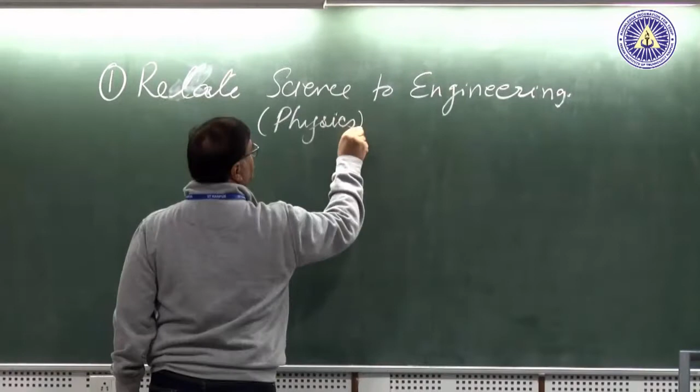Science, okay, so let us say physics. You are a physics teacher? So I would say each component contributes, but since you said physics, I will also write physics specifically.

So that is relating science to engineering, is that what you are saying? I mean, can I put that in a category, or do you want to say something more? So, engineering and applications - since you said a word, let's put this in as well.

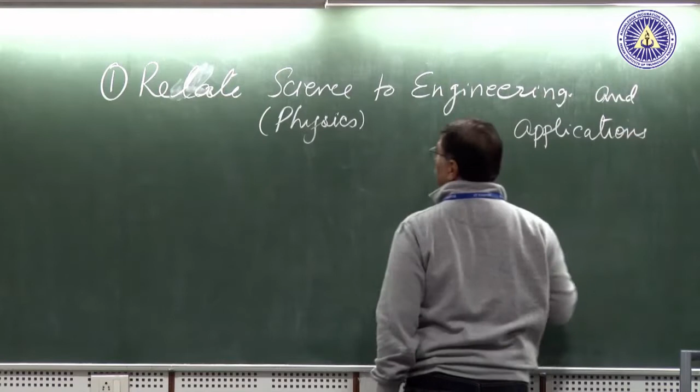So that is one purpose, right? What else can you think of, and what else do you think of when you teach?

Speak up, otherwise it will go wrong. Say something, I mean there is nothing wrong. We are just trying to develop ideas.

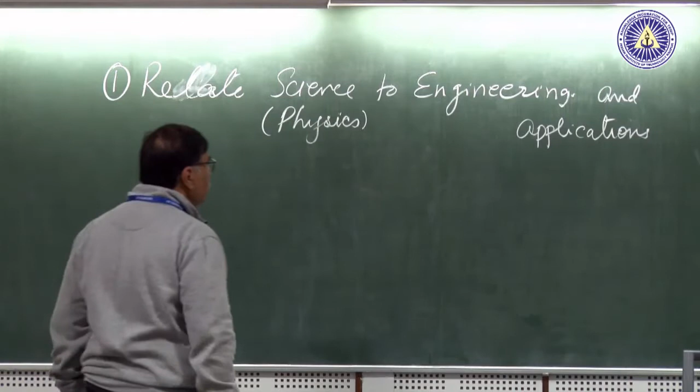I will add to it now, okay, I will start adding. So this is one point, but this is something anybody can say, that I want to do it, right.

I will add a few more, but I would like to know, when you say it is easy to say that I would like to relate science to engineering, when you teach it, how do you do it? Or if any one of you has done it, how do you relate it to engineering?

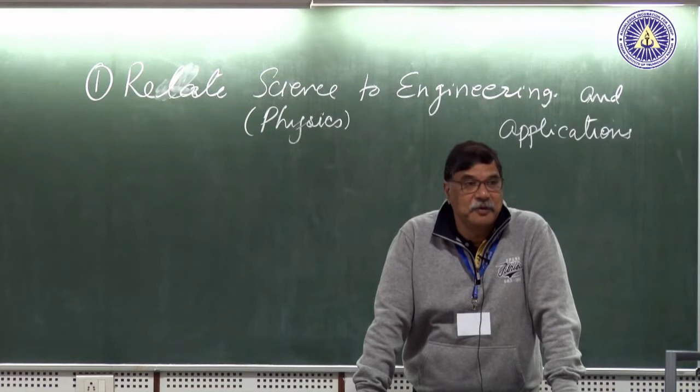See, we can say that, like he said, physics is the father of engineering, right? So what do we see happening? I want to understand it - number one, I want to understand it. Number two, I want to see how that phenomena can help or hinder any engineering application. For that, I have to work hard. I have to see engineering problems, see what they do, and then relate it. That's where your role comes in. So, I am still looking for more answers.

Has any one of you, although you are starting anew, think of an example where you would relate it to engineering. Engineering also means I am talking to students who have just cleared 12th grade. They have seen some things around them, but not necessarily great engineering marvels, so I have to show them the beauty of science in the small engineering they see around, so they start appreciating it. The mistake we all make is trying to relate to big things, like a nuclear reactor or an aeroplane flying. A student who has come from a village near Madhubani may not have seen an aeroplane, but he has seen other things, so we relate it to those.

This is one part we must keep in mind in core teaching. I am bridging from 12th grade, making them graduate to a place where they start seeing how it is applied and why it is relevant. But more important, as somebody said, students have come just to clear the exam, most of them. But I would not be that harsh, even if they try to see the science in a bigger way.

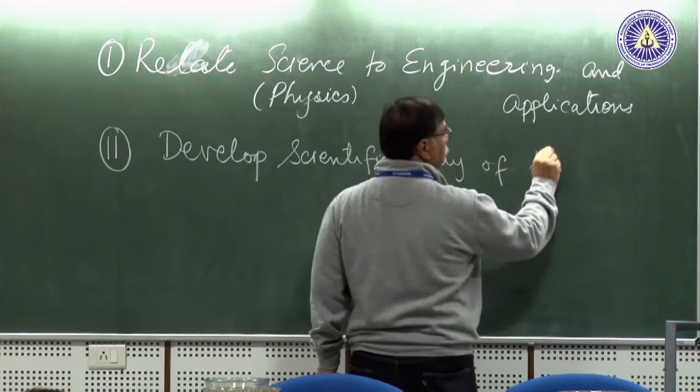Very important - if I just take Kleppner or Resnick-Halliday and solve the problems, I don't. This is where I as a teacher come in. I want to show them the bigger picture. I want to show that it's okay to make mistakes when solving a bigger problem, but then you also learn how to come out of that mistake, how to analyze. So this scientific way of thinking is what in parlance is known as scientific temper.

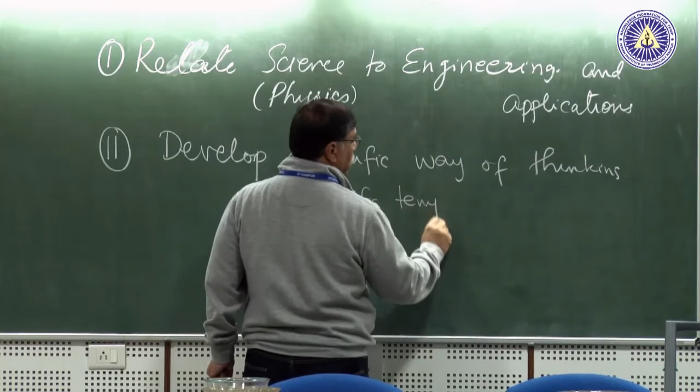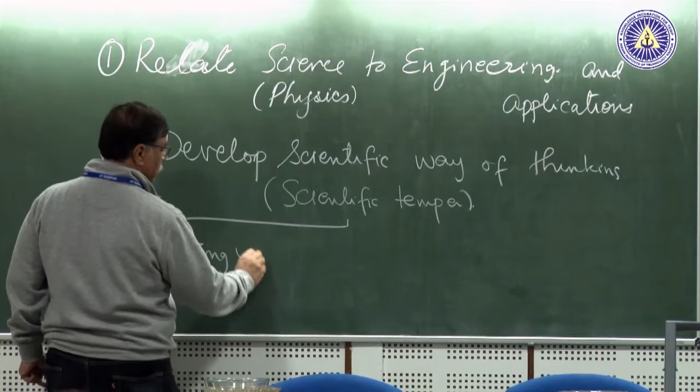Which will involve setting up a problem. If I look at, for example, why is it important - suppose in a civil engineering structure, some crack has developed, and I want to analyze why it happened. Is it that the cement dried too fast? Is it that the water ratio I used was not proper? It is formulating a problem. So, setting up, or I would even say formulating.

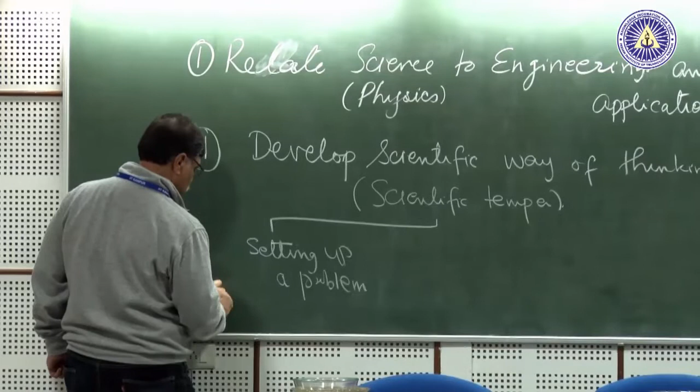I want an engineer, I want my student, when he or she goes out, to be able to look at a problem and see why it happened. I formulate the problem, and that requires scientific thinking. It is not just that I've been given a problem from Halliday Resnick or some coaching book and I solve it - I have to really look at it. Maybe it happened because of this, maybe because of this - so I list 4 or 5 possibilities, then scientifically remove one or two of them, and arrive at the real thing.

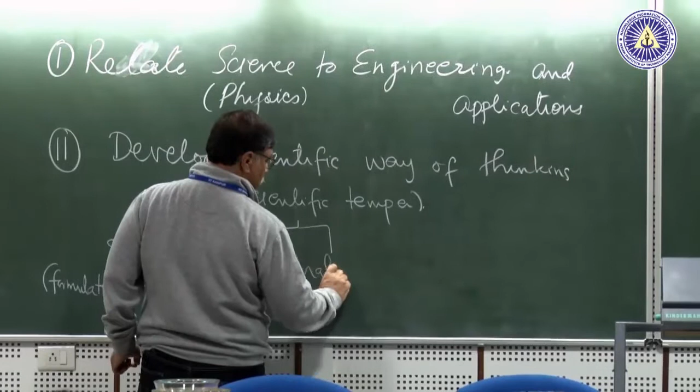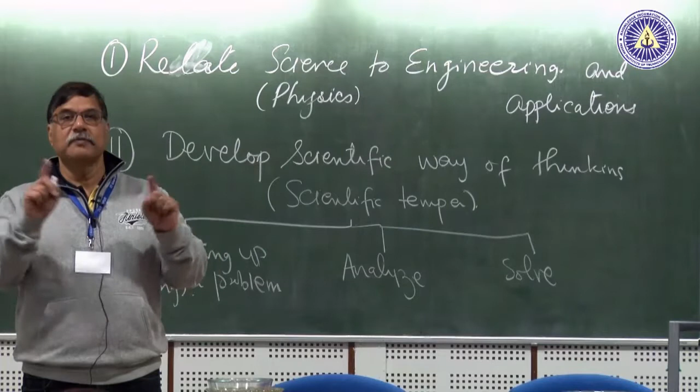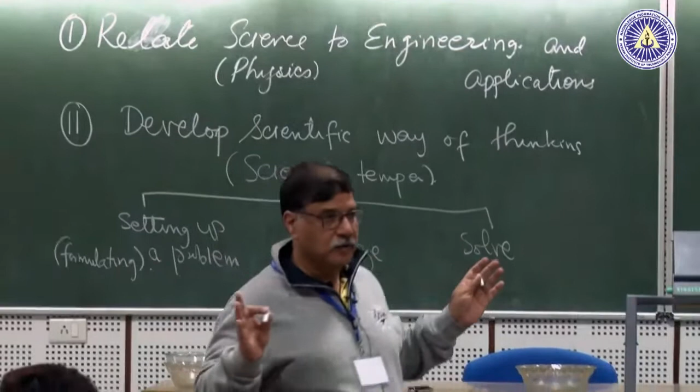That is called formulating the problem. And once I formulate a problem - setting up a problem - that is analyze and solve. When you solve, even in engineering, although we make our laws precise and exact, they are exact because I perform those things in ideal conditions. Real life is not ideal. When I say Newton's first law, something in the state of motion remains in motion if there is no other force, but in real life there is friction.

And how do I take care of that? Similarly, if I am a defense engineer designing an artillery, all I would say is this is a projectile motion parabola, but in real life there is friction, drag. Higher the speed, the power related to velocity is even higher. I should be able to solve it within some approximation. And finally, what do I want? If I am firing a shell, I don't want it exactly 500 meters - it could be 505 because after all a shell makes a hole of maybe radius 5 meters, so within 5 meters I am okay. So, how do I solve the problem in a meaningful way? I would not say approximate way, but in a meaningful way.

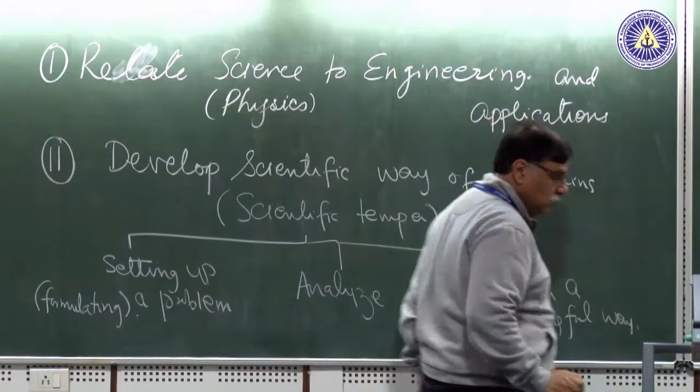I don't like to use the word approximate, because approximate somehow means it may be exact, but no. But even if you solve it approximately, it could be very meaningful, in a meaningful, relevant way.

So develop scientific way of thinking, relate science to engineering and applications, and the two are related. When you solve the problems, you relate it to engineering problems and how some great minds worked to solve a certain problem, right.

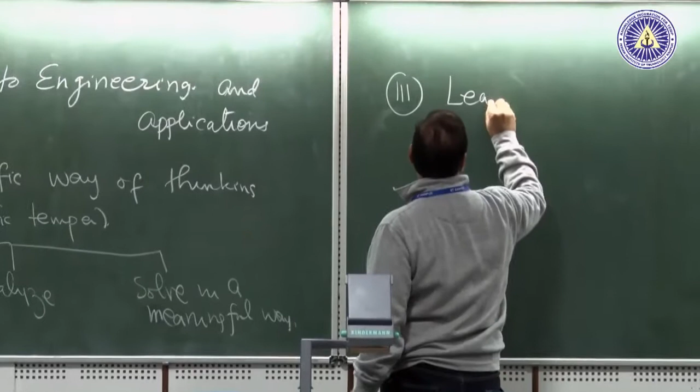Although it may come under this, learn to take up some challenging problems. I mean, people don't emphasize this for fun, this is you challenging yourself. Can I solve this tough problem? Whenever you are teaching core, although the kids are here, you should always give some challenging problem. Let them see how much potential they have, right? And it also takes the fear out of them. A lot of students are scared of using symbols of mathematics, curl, divergence, things like those. Take the fear out of them, make them solve a lot of problems and keep relating to different things.

Okay? Now, can you think of anything else? I mean, this is, if I can accomplish this much, I think core I have done, right.

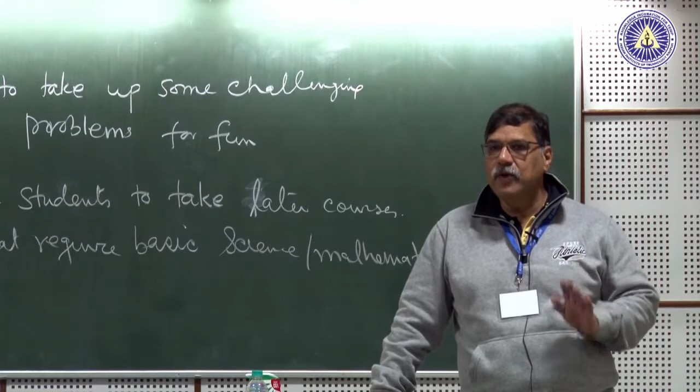So, fourth important thing, although we said that there should be a bridge thing, this is the application part, but I think if I consciously write it, it will be good. Prepare students to take up future later courses that require basic science, mathematics. For example, if I am teaching electromagnetic theory, and I do that in my courses, most of the mathematics that is used, and I am going to show it to you, is exactly the same that is used in fluid mechanics. If I train them well in electromagnetic theory and try connecting with other fields, fluid mechanics, and flow of heat and things like those, I actually prepare them for heat and mass transfer.

I have done that in the class, and the students have later come and told me that, sir, that course, that time we thought you were teaching very tough, but later we realized it was very good, because fluid mechanics became very easy, heat and mass transfer became very easy. So, the core courses play a very important role.

Core courses develop scientific way of thinking among the students who have just come fresh out of 11th or 12th grade, thinking they know all the science. Then you can ask them to analyze the problem scientifically. They also think, why am I studying this? So you prepare them, you tell them the immediate goal that you relate to the subjects later. You also tell them how all this is very relevant to what you do later as an engineer. And even some things, if I give you a challenging problem, it may not look relevant even to me today as an instructor, but later you may find it useful.

Okay, so anything else that you can think of? If I am teaching a core course, and most of you are teachers in physics, mathematics, chemistry, physics, you keep these 3-4 goals in mind, your course will become fantastic.

Yes. And to our teachers who are from engineering background, it would also help you if you attend the classes in core course. For example, yesterday he emphasized that you become tutors. You will be able to explain the engineering points much better from a scientific point of view. Also, in this developing scientific way of thinking, yesterday Professor Upadhyay emphasized that you have to update your courses.

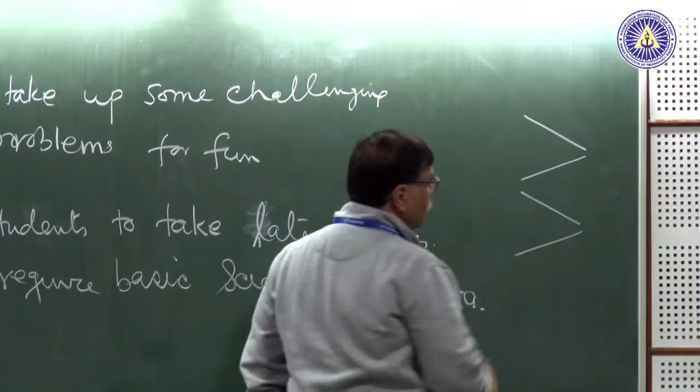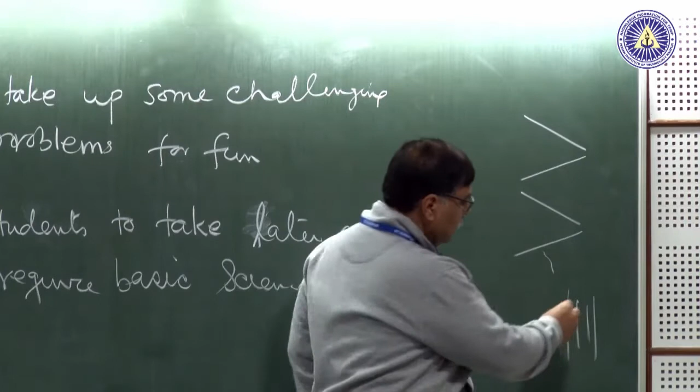This was my big lesson. We made strips like these, made them very smooth so they are almost frictionless. Suppose this is a strip - we put two wires on each strip, and when the coin went in, it connected with the two wires.

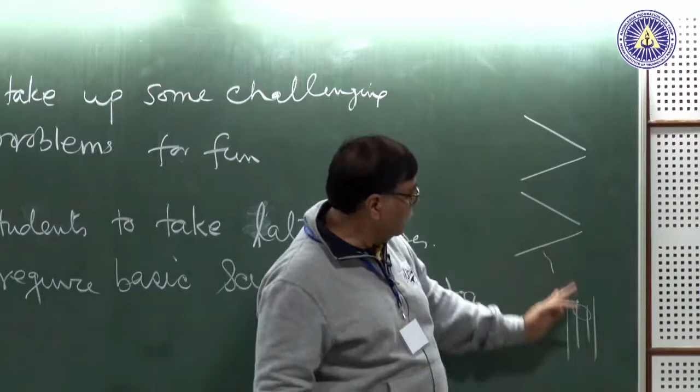So current started flowing, and that current powered an electromagnet that opened a valve and the water came out. We calculated the time so that exactly in 1 rupee, if you wanted half a liter, we gave that slope and half a liter of water was supposed to come out. Everything was fine, we made everything, then we did the experiment and put the coin in, and boom, the water kept coming out.

What went wrong, and again this is through experimentation - the coin didn't move. But why didn't it move? It's not because we hadn't calculated the time, that we had done already, it was matching.

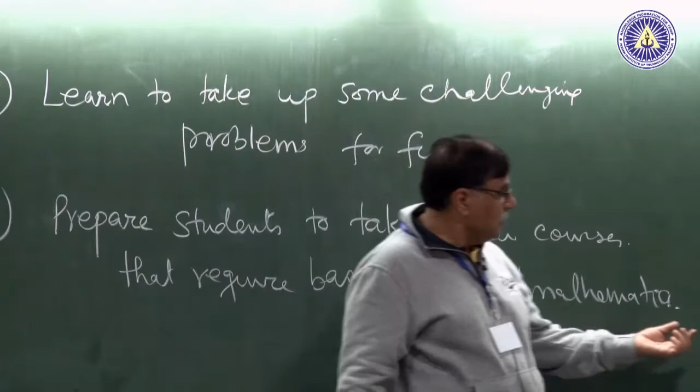What happened was something we could not see - the moment the current flowed, there was a lot of magnetic field that held the coin right there.

So what we did, since our project evaluation was there, we took a coin, made a hole, put a rod through it, and kept pulling the thing out. The instructor in charge said, oh, now this only works with a particular coin. But he appreciated the effort, and we said this very honestly, and he said no, this is - you have learned what the essence of design is, that you have to experiment.

So through all this you have to teach whatever science you are doing. If you want to relate it to engineering, find applications, and along the way you can also do some fun experiments so the class becomes exciting, but then you keep relating it.

In the back of your mind as a teacher, as a driver of the class, it is clear where you are going. So what I am now going to do is take a few fundamental principles and try to tell you how to demonstrate them, how to relate them to engineering problems. All right, let's begin one by one.

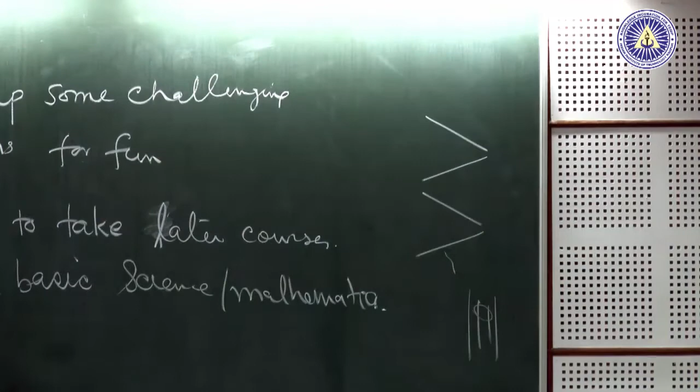I will start from mechanics, go all the way up to electromagnetic theory, and along the way we will also do some fun stuff. This is fun, but at the same time when you are doing it in class, you have to keep explaining the principles behind it and keep relating it.

So just to start and have fun, let me call one of you. Why don't you just come here? Anybody - yeah, you come here. Just stand here. Demonstrate Newton's third law. I don't want you to move. Demonstrate.

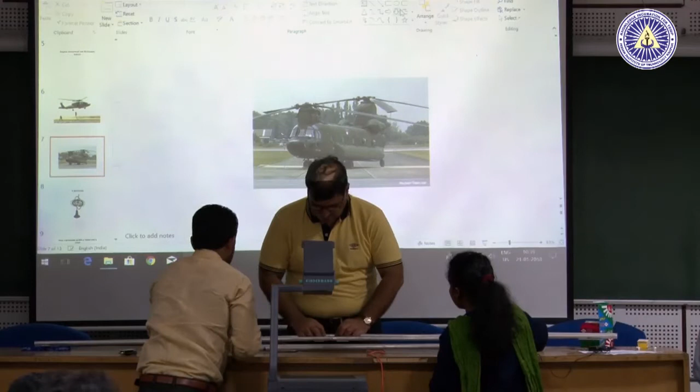This is at the end, so let's make this track, all right? To give it height, because I want something to roll on it. Okay, and then there's the last one. Put it here.

All right. Okay. So you see this? All right. Let's remove all this junk so that it's all out. Now, what I want, a lot of people, you should come and play around with it.

Okay, what I want you to do is, I have these 4 different kinds of rollers. Alright? So, honestly, I have a little smaller one, but the bigger ones are okay. Honestly, I'd like you to come.

Do you need this? Yes, remove that one too. I'd like you to come and honestly in your mind think about, if I leave a roller from here, which one will go all the way through all the curves. Okay? Come here and honestly tell me if what you thought was okay.

Try all these 4. Who was what? Okay. So you show, please, it is as if your class. I am doing this and this is what is going to happen, I think this is what happens, and then you show the result.

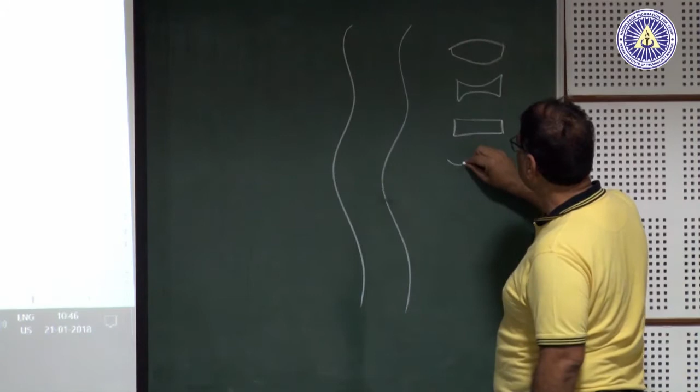So what we have learned - please, anybody else who wants to do something? So what we have done is we have taken this cylinder, a plain cylinder, and a cylinder which kind of fools people that, oh, it will cover the thing both ways,

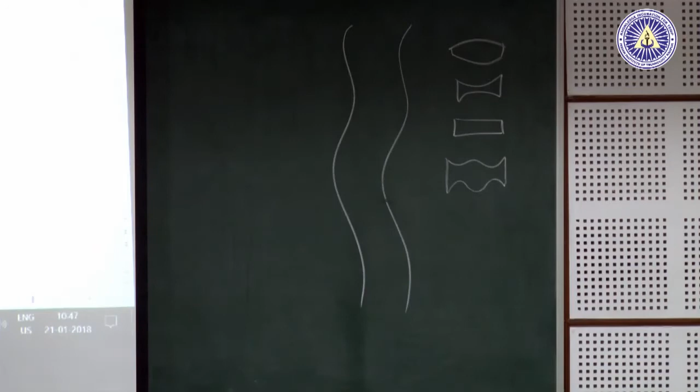right? It is this one that goes through. Why? Sir, when a curve comes and the cylinder slides in, either in one way, and the radius changes. The radius changes, right? Where is it used?

Railway - so I'll show you that. Okay, it's an engineering application. Okay, so now I'm going to show you. Page down.

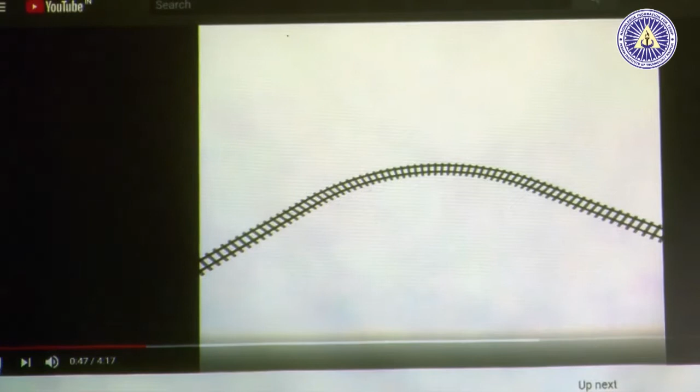Right now, you see, it shows the two radii, and when a wheel goes - now you see, this is precisely that roller that we used. The middle part is removed, right? Now when the wheel goes, it's supposed to... okay, now it will start moving.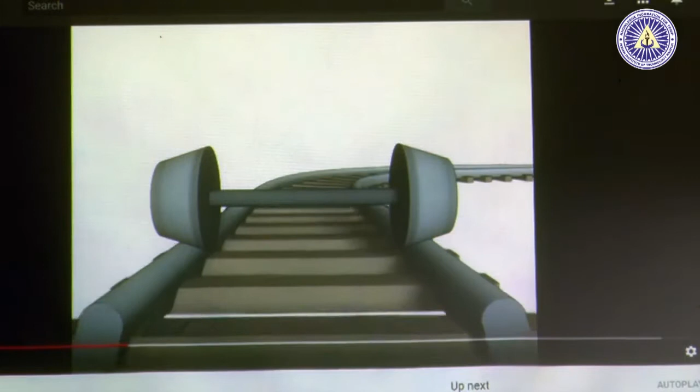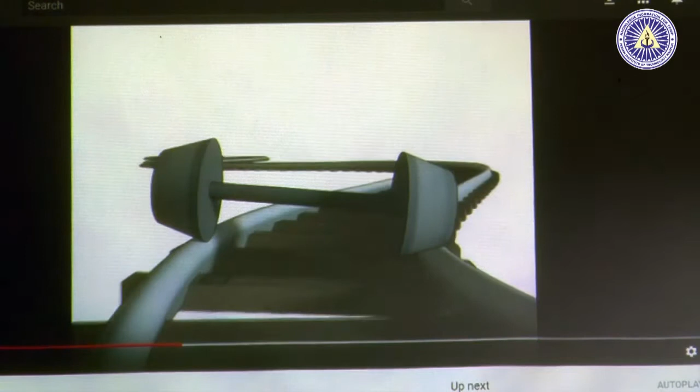Now you see, because it's turning to the right, the left wheel has gone up on the track, and therefore its radius of curvature becomes larger automatically. With the same omega, the outer wheel now goes faster. Similarly, when you go the other way, the wheel on the outer side will always have a higher radius, and therefore it will negotiate curves both ways.

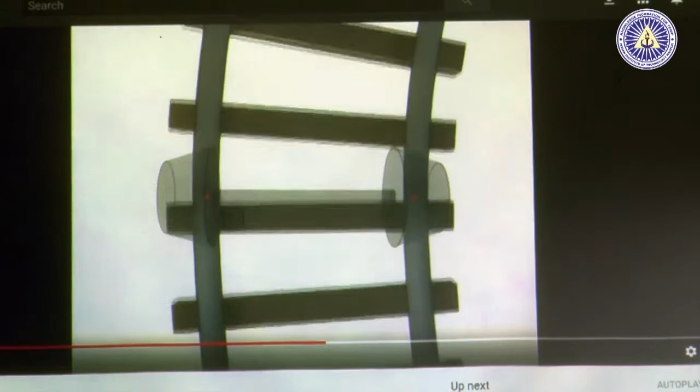Somebody, when making railways, must have observed this. Just from observation, they made a railway track and a railway wheel. It's a fantastic innovation. If you think about it, you don't need a differential gear, nothing. Just by giving a slight slope, you're making something that turns on the tracks. And that's the engineering application you see of it. It's a pure kinematic effect, V equals omega r, and we are making use of that.

So the point I am trying to make is: you make a demo, you also have things available on YouTube that can immediately connect.

Now a design problem. Is it clear why that thing was going like this? Because when it turns, the higher radius comes on the outer side, and therefore that part moves faster. And it's a fantastic innovation.

A similar design problem for you and other engineering students: if you look at the rickshaw, it cannot have a differential, it does not have one. So when the rickshaw wala turns, what will happen? One of the wheels will skid, and the wear and tear will be higher.

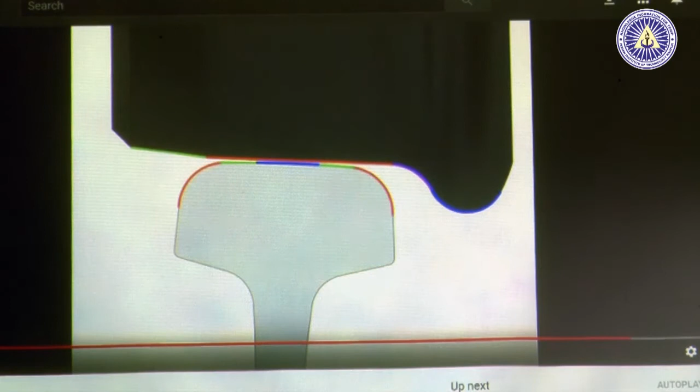Or there is another design used in Thailand, where they make one of the wheels free. One wheel is connected to the pedal, the other wheel is free, so that it adjusts its speed when you go around, but it makes it a little unstable. It can topple. That is a fantastic design problem for you, for engineering students. It's a very simple thing, but you apply engineering.

Now we will go to a slightly higher level on this. Let me write this here. I am going to search for how a bullet train works. Now, does the same principle apply everywhere? Let's see.

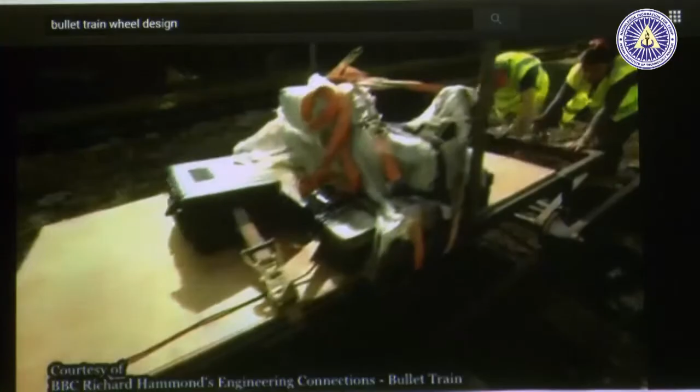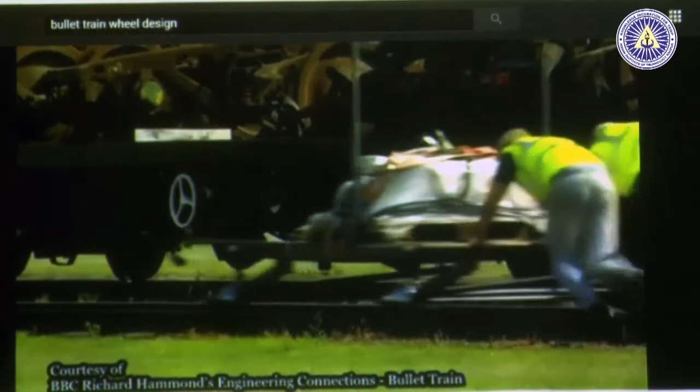He is doing the experiment with the same kind of wheels used on the railway track, but now on a straight track, and he will show something very important. It doesn't even have its own power, but that doesn't matter, because he's got a powerful winch to drag it along this dead straight piece of track that speeds up to 50 miles an hour.

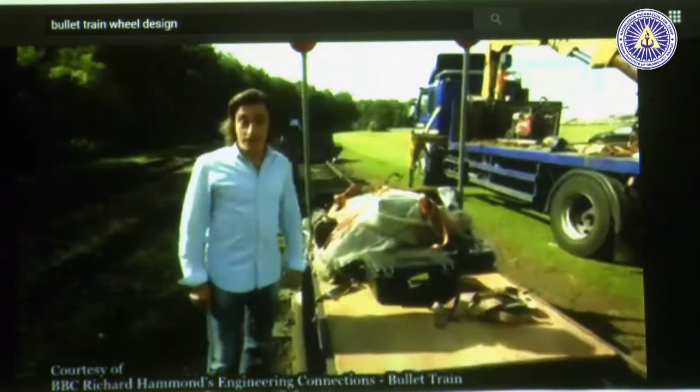Unfortunately, Hammond railways don't stretch to basic amenities like seats. That's one reason I won't be riding on my carriage. The other reason is it doesn't have any brakes. I did say it was basic. It'll be brought to a complete, probably sudden halt by that barrier down there. On the plus side, this has everything we need to show what high-speed train engineers are up against, namely we've fitted it with these train-style wheels.

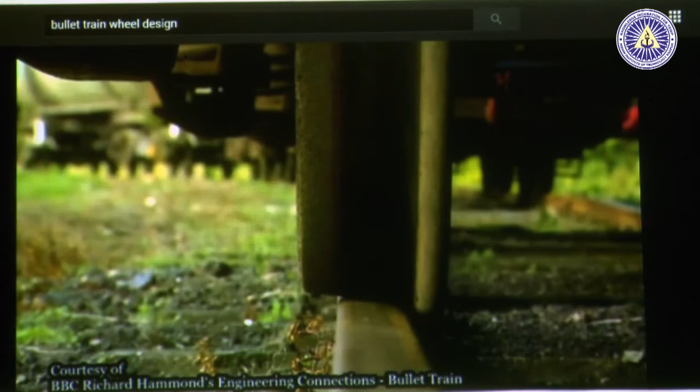They're exaggerated, yes, but just like real train wheels, they're conical, angled where they rest on the track. They might look pretty odd, but according to Paul Allen, an expert in wheel dynamics, they'll show clearly what happens to real trains traveling at speed.

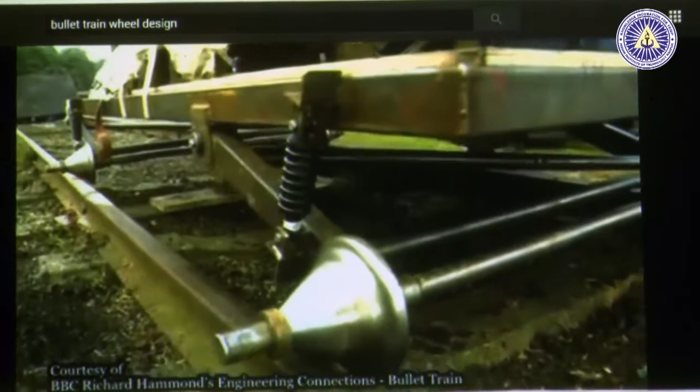Finally, Hammond Rail is offering a feature never before seen on trains: basketballs on corners. They'll show how the carriage moves. He's revving his V8 muscle car from the 1970s. Here he goes.

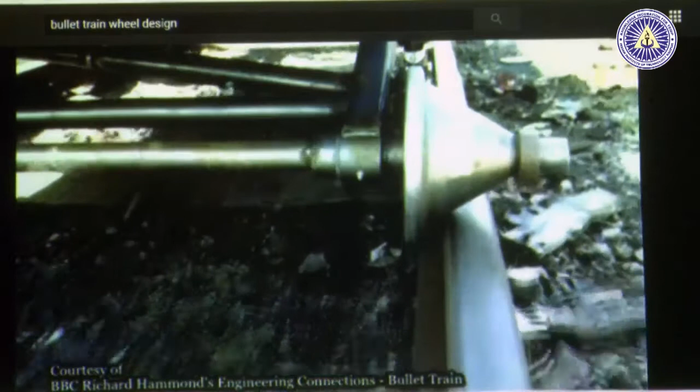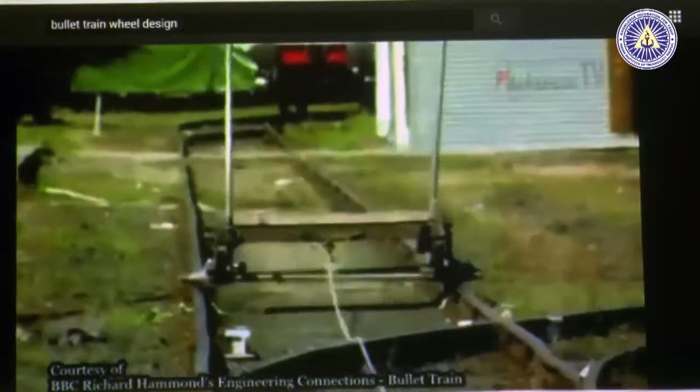As it speeds down the track at about 40 miles an hour, the carriage starts rocking from side to side. It's called hunting oscillation. Is that why the tops of these posts are moving side to side? Yeah, you can see it hunting a bit now. That's not gone at all well for it, has it? That's a bad thing, the kind of thing you need to avoid.

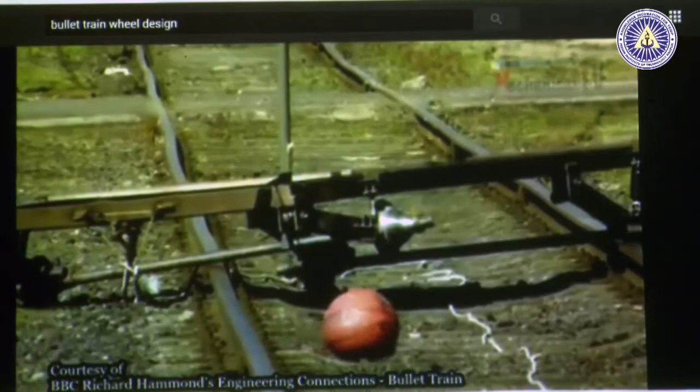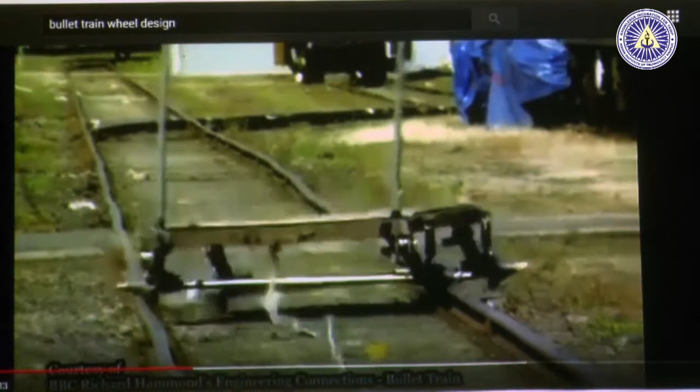So after that, the design of the bullet train comes. The point I want to make has been made: railed on a straight track, the repeated sideways movement can also occur. Even with conventional wheel design, if you go to high speed, the whole thing becomes unstable, right? So this is what engineering is all about: experimentation and finding out.

So the simple track experiment showed you how the wheel design should be. Then I showed you, if you want to go to high speed, even this becomes unstable with that hunting oscillation, moving side to side. You have to come up with a new design. This is how in a core course you can actually excite students, right? Is the point well made?

Understood? And you see, these things are available. I am just pulling them out right in front of you, right? Okay, now furthermore, this part is done.

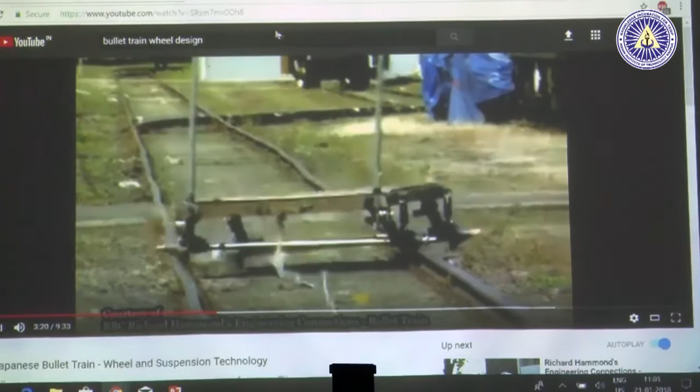Now you see, again, this experiment is very easy to make. You just take some aluminum things, put them on the track, make them like this, and it's done. Now what I want to show you is how, if you don't have machines and all that, you can even make it very nicely at home. And here it is, one second.

You want to make them at home or just in the class quickly? And I did that in the class just for the sake of showing. And here you go, okay.

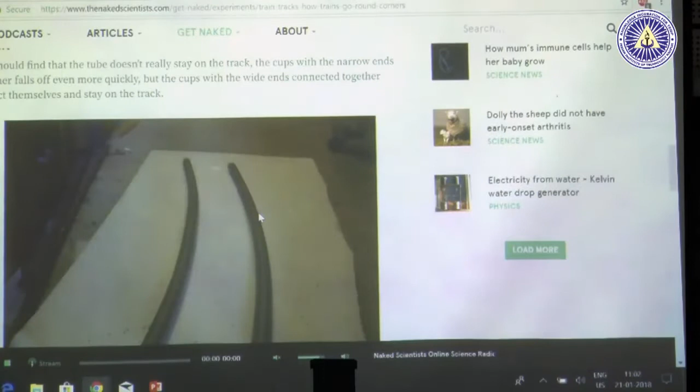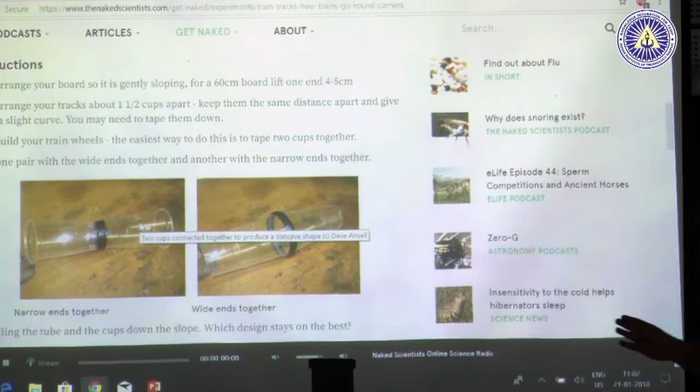Train tracks, how trains go around the corner. Here it is: you just take two pipes and glasses at home, we all have those, right, the throwaway plastic glasses. You can just add them together and make these two kinds of wheels, right, just in the class, and you're done. It's so easy to do. So that is the point I was also making yesterday, that these things are very easy to make, but they make the point very nicely.

Okay, you can just show the train turning through this. Now, I am going to change tracks and let me see. I am going to show you something about stability.

Have you all heard of a gyroscope? Yeah, what does it do? It measures the rotation from a certain axis. What else? So I want to show you something about what a gyroscope does.

What a gyroscope does is actually... I wanted to show you the bigger gyroscope, and that's the story I was telling yesterday, but the stand went out, so I'll have to show you the small one, all right. What it means is, I'll give you one word for that, and then I'll show you something very interesting. Okay, how are we doing on time? I mean, on this I can just keep going on and on and on.

Then I can show this to you. Of the methods used to stabilize a rocket, if you like, and keep it on its trajectory, there's one that most people I think are familiar with, and that's the stick on a bottle rocket like this.

By the way, on this you can make a very nice problem: holding the stick on your hand, how long does it take to come down? Counterbalancing the stick is all very well for a firework, but I'll leave that as a challenge for you to make a problem of the stability of the stick on your hand.

A real rocket needs something that's far more dynamic and able to cope with the changes and aerodynamic movement, wind on the rocket, and things like that. It needs to be a principle as dynamic as I'm trying to demonstrate here with this out-of-balance broom, trying to keep it upright.

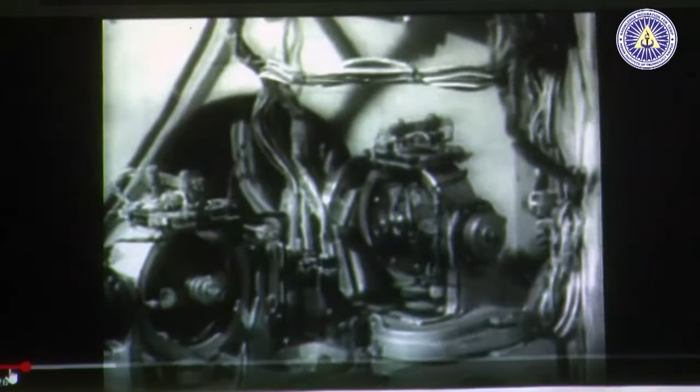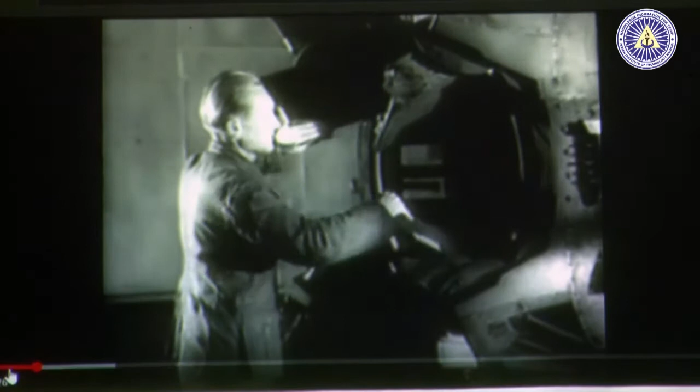Yeah, these gyroscopes are the brains of the rocket. They are in universal mountings. Electrical pickups measure the movements of the gyroscope and translate these movements to the carbon vanes and the trimmers in the tail unit. These vanes and trimmers direct the rocket both in bearing and elevation along its trajectory and prevent any deviation from its planned course.

The four vanes are in the jet of the rocket, and there is a trimmer on each of the four fins. This mock-up represents the inside of the control compartment in the rocket. In the background is a skeleton tail unit, with the vanes and trimmers in position.

The control compartment moves, the gyroscopes move in their mountings, and these movements are conveyed through electric cables in the rocket to corresponding servo motors in the tail unit. There is a servo motor for each carbon vane and trimmer. The servo motors move the vanes and the trimmers to counteract the original movement of the control compartment.

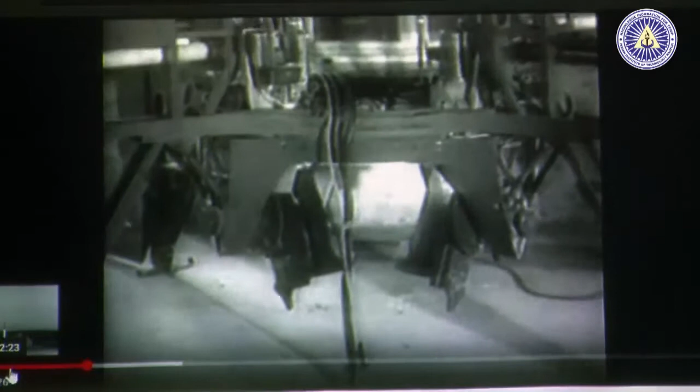So it brings it back. There's a feedback mechanism.

This gyroscope controls the elevation of the rocket by moving a pair of carbon vanes, thus turning the rocket from the vertical over to an angle of 43 degrees. The other gyroscope controls the direction of the rocket by the movement of this pair of vanes.

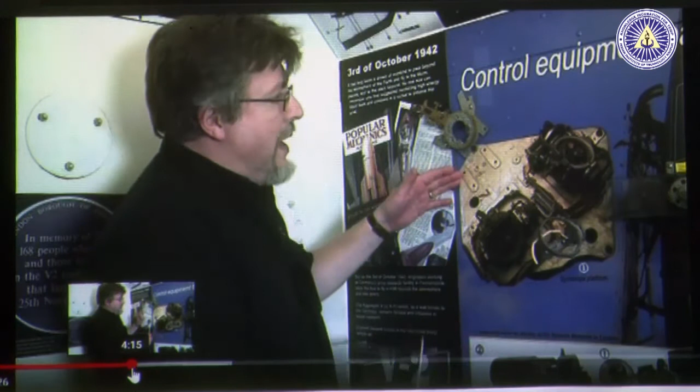Let's take a closer look at a real gyro platform from a rocket. Here's one from the German V2 ballistic missile. That was fairly well an engineering marvel, that the German V2 rockets were so precise. That is one technology the Americans wanted when World War II ended.

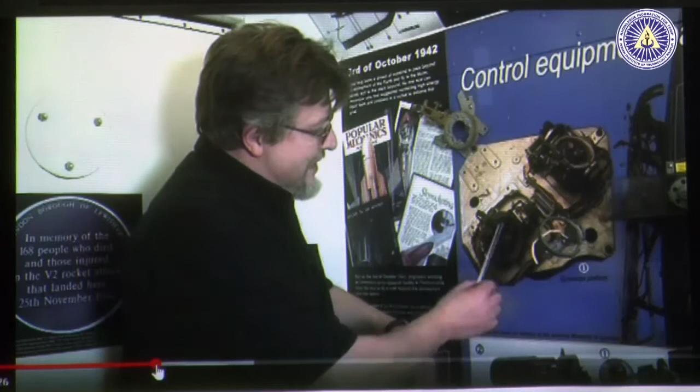I actually made this gyro platform that really lets us show you how this stability comes about. This is the same gyro I showed you, and I just want to show you some of its properties and see if we can pick up some of how this device might be able to control a rocket.

I'm just going to give the string a good pull, get the rotor going. The first thing it seems to be able to do really rather well is balance itself. I'm going to take it off here, put it on its little stand. This means stability. Gyro means stability.

That's a very good demonstration of the conservation of angular momentum. It's beginning to precess a little bit now, but I still don't think it's absolutely obvious what it is about the gyro that's going to allow us to control a vehicle like a rocket.

So I'm going to try to show you next what's going to let us actually control a rocket. He's going to make a gimbal - this is basically the outside frame. So there's what we've made, a gimbal unit, so that I can now put the gyro into that inner gimbal frame.

It's not exactly a wonderful piece of engineering, it's not really going to win me any prizes I don't think, but I think it will do for our demonstration. The gyro is now free to move at any angle, and this is going to give us a much better chance to show you one of the principles of the gyro. It's got plenty of rotation on there.

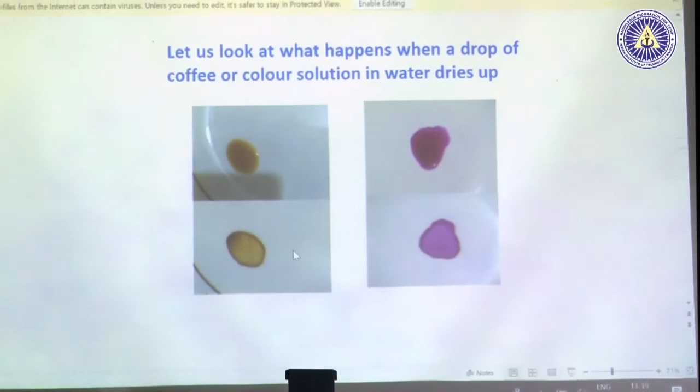What I did is I took this coffee thing and put it on a plate at home. So, as the drop dried, you see what happens, on the side it is much thicker, the material comes to the sides. I took the Holi colour, made a drop and let it dry, again the same thing happened. This is known as the coffee ring effect.

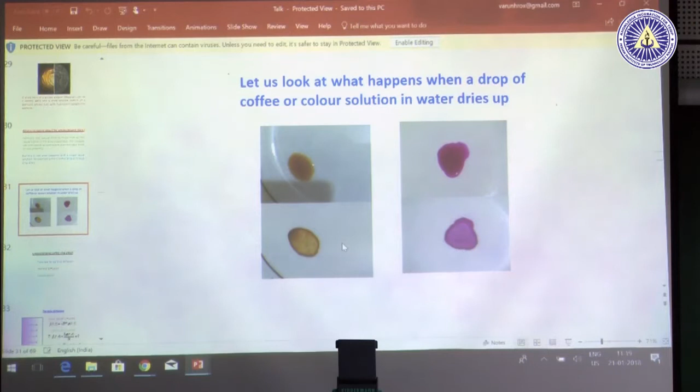Where do you think it could create problems in engineering application? Inkjet printer, when you put the ink drop, when it dries, it can have the same effect, and it does. So that ink drop, when you read it, will not be uniform, it will be thicker on the sides. You have an engineering problem at hand.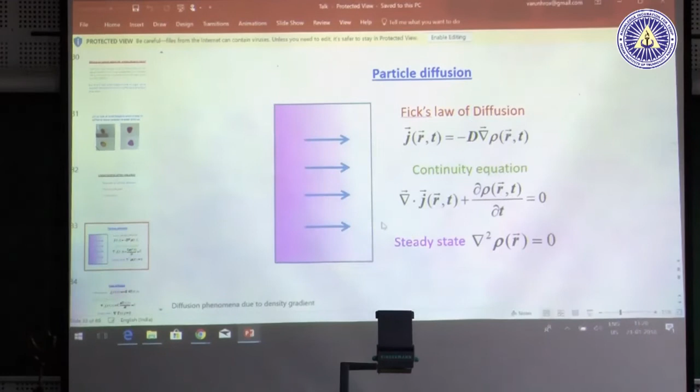You cannot print uniformly with an inkjet printer unless you overcome this problem. There is a lot of research on this, and there are other effects. Now, first I have to understand why this happens. This is again, when you are talking engineering, you can talk to a lot of students, so I do this when I teach electrostatics.

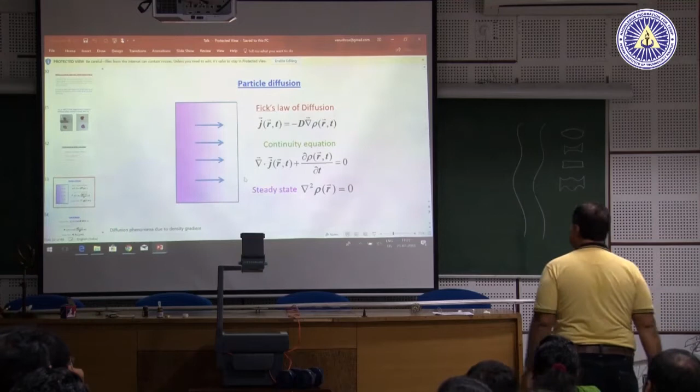In electrostatics, there is something called Laplace's equation for electrostatic potential, del square phi equals 0. We all teach that. Not only does it occur in electrostatics, it occurs as a beautiful equation in mathematics, everywhere. Now let us motivate this. If you look at particle diffusion, there also in a steady state, the density distribution or distribution of particles satisfies the same equation, del square rho equals 0.

If you look at thermal diffusion, if heat is going from somewhere to somewhere, in a steady state, temperature satisfies the same equation, del square T equals 0. So what does it mean? If I have solved it for a temperature distribution, I have solved it for my electrostatics problem, I have solved it for my particle diffusion problem. I am connecting them, and so they are all related, and I will show it to you.

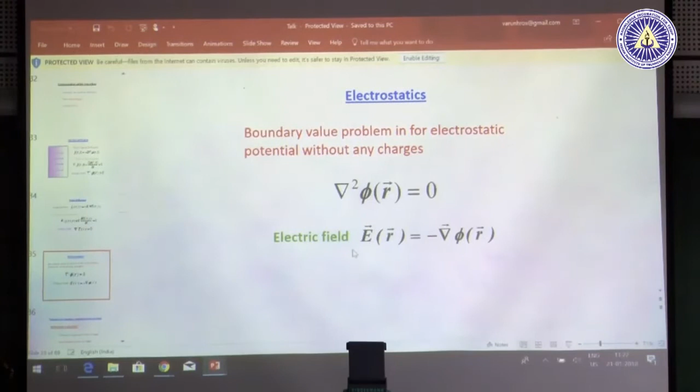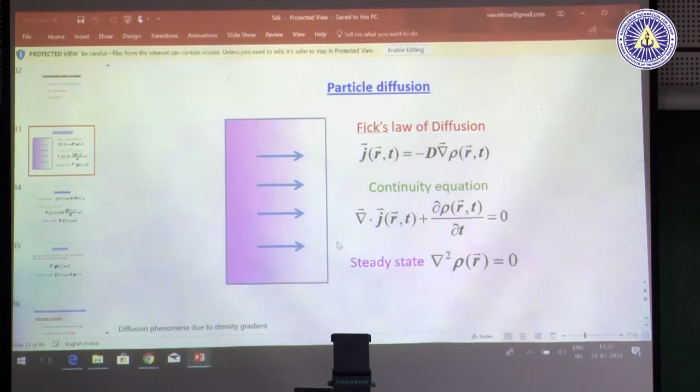So, electrostatics: del square phi equals 0, electric field is gradient of potential, flow of heat is gradient of temperature, flow of particles is gradient of density. So electric field current corresponds to heat current or particle current. Now let us see what happens.

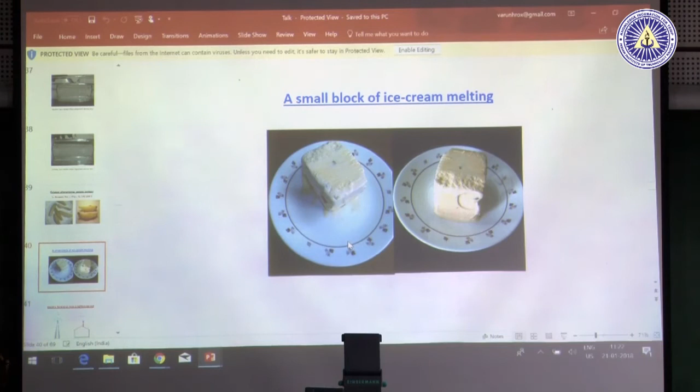Where do I use that? If you look at the electric field lines near lightning conductors, they are very sharp. So when lightning strikes, it strikes right at that corner, because that is where the electric field is.

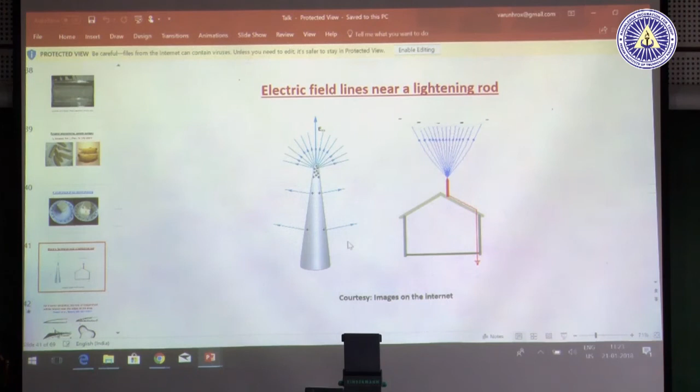As I said earlier, electric field is the same as thermal current, is the same as particle current. So if electric field lines are sharpest near the edge, where would the diffusion current be sharpest? Maximum near the edges. Maximum evaporation of water takes place near the edges. Therefore, potato fries become dark near the edges first.

Similarly, heat current would be maximum near the edges of the ice cream cube. So maximum heat goes into the ice cream from the edges, and therefore it melts near the edges first. All the edges become very smooth, they are all connected, and it is the same effect that gives you the coffee ring.

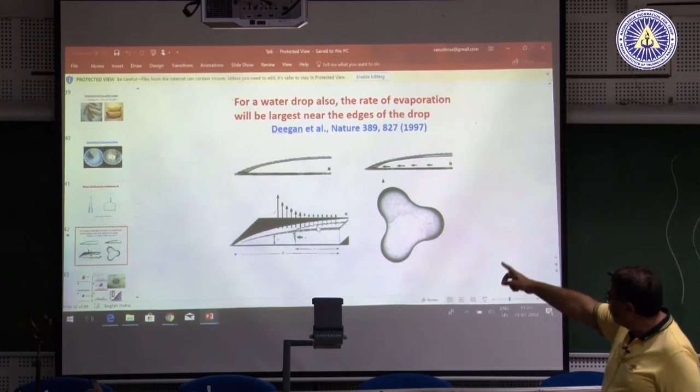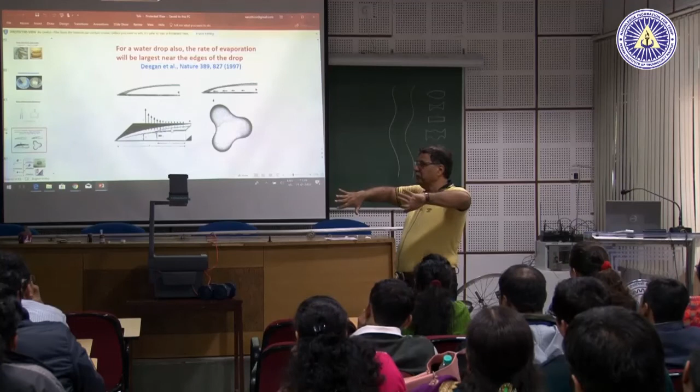If you look at this drop, we have shown a drop. Maximum evaporation of water takes place from near the edges, that is why potato fries become dark near the edges. When water goes from the edges, the rest of the drop's water will move there and bring all the material with it. If it brings all the material, what you have at drying is that coffee ring.

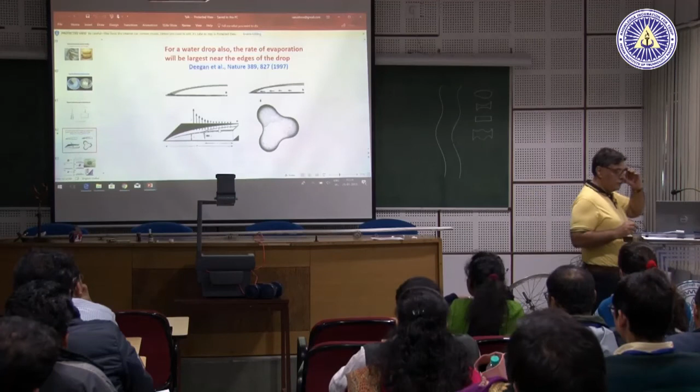How do I control this? There are tons and tons of papers on this. You control it by playing with the surface tension and the water flow. Surface tension is controlled by something called the Marangoni effect, but anyway, that is a different thing.

Now I wanted to show you this. This was the wrong way of using it, where because of this your drops become non-uniform. This is done by Professor Monica Katiyar in our MSE department. She used it the other way. She said, if things deposit on the sides, and if I start depositing things, there will always be an edge on the side and it will make a kind of cup.

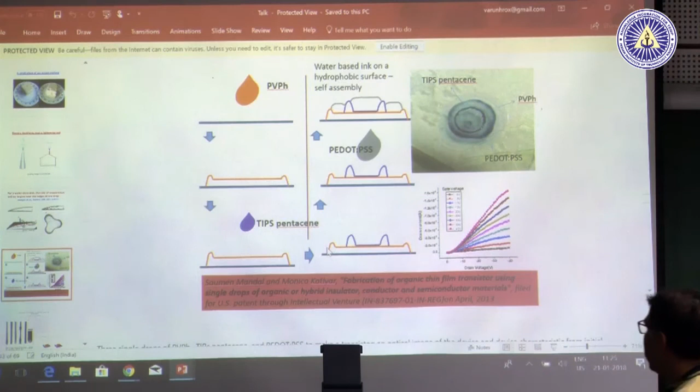So I can deposit different drops using that cup, and she made a device out of it. So again you see an effect related to electrostatics, thermal diffusion, particle diffusion being used in an engineering application. This is how you can connect and excite students about how this core science they are doing is related to later courses and to engineering problems.

So now let us see what else do I have. This is how they did it. These are different papers that came. Let me see if I have something else.

This is something I had, I do not think I have a movie for it, but let me tell you. If you take a piece of paper, put some potassium permanganate on one side, fold it and dip it in water, you will see maximum potassium permanganate goes from the edge. Sharper the edge you make, more will go from there. That is basically an effect of diffusion taking place from the edge.

That is the one I have, and I think I will stop here. It is 11:30. Hopefully I have given you a flavor of doing science, teaching it, but connecting it with engineering problems. There are a lot of interesting problems available on YouTube. You can make them easily, and use a combination that hopefully will excite students, and also keep the science core courses relevant for them. Thank you very much.